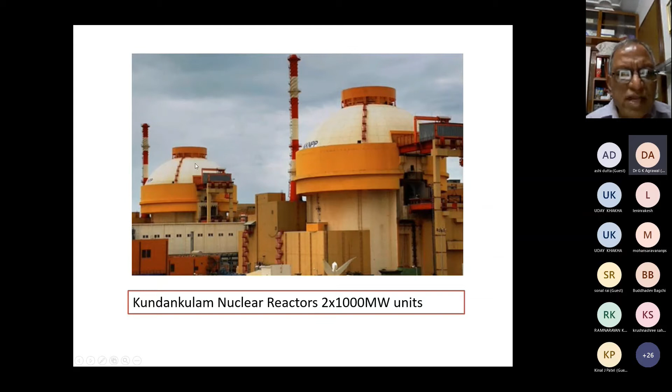Now it's a very big site. In my time it used to be very small, only two reactors like this. These are the two reactors which used to be there in the beginning, and now it has got 8 reactors, and a heavy water plant is also there. Nuclear fuel complex is there, PREFRE is there. It is a very big site, very big nuclear power plant. Whenever I am passing through, I bow my head there because it is a place of worship, for a man like me, but for every Indian, it is a proud site.

This site has only PHWR or CANDU type reactors - 4 reactors of 210 megawatt, 2 reactors of 500 megawatt, 2 reactors of 700 megawatt. It's a big site, and it is on the bank of Chambal River.

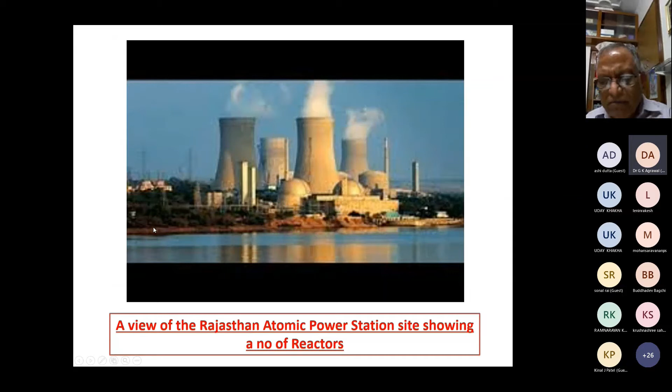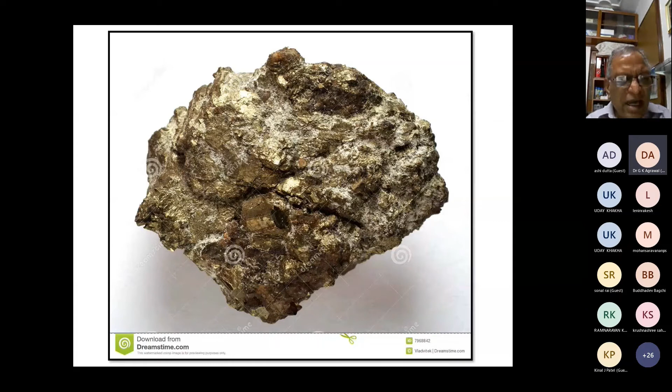Till now there is no problem. The only thing, it is an alpha emitter, but there is no problem. There is hardly any radiation other than alpha, and alpha is very feeble; it can be stopped even by a paper. Now this slurry cannot remain as it is. It will get oxidized immediately.

So what we do, we oxidize it. Anyhow it is going to get oxidized. The melting point increases by oxidizing it. This is uranium dioxide, uranium dioxide. It is fused with oxygen. Pellets are made, just like gunshots. Pellets are made, and these pellets of natural uranium.

Please take care of my words. Natural uranium pellets are inserted into these zircaloy tubes. Zircaloy tube. And then a fuel bundle is prepared. In this fuel bundle, we have got many cartridges like this. Natural uranium. Here we have some amount of uranium-235 where fission takes place.

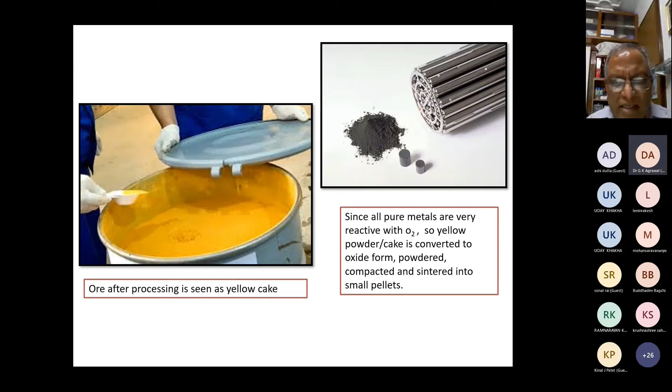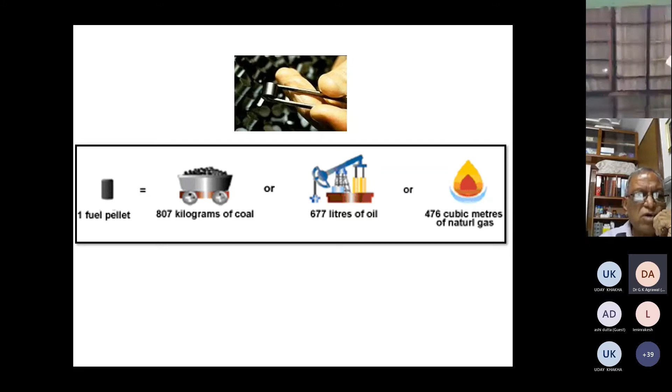Now, this is just a comparison. One small pellet, hardly a few grams, is equivalent to 807 kilograms of coal, 677 liters of oil, 476 cubic meters of natural gas. Just very small. Some technician is holding this by a tweezer just to show how tiny it is. It may be only a few grams, and uranium-235 may be very small.

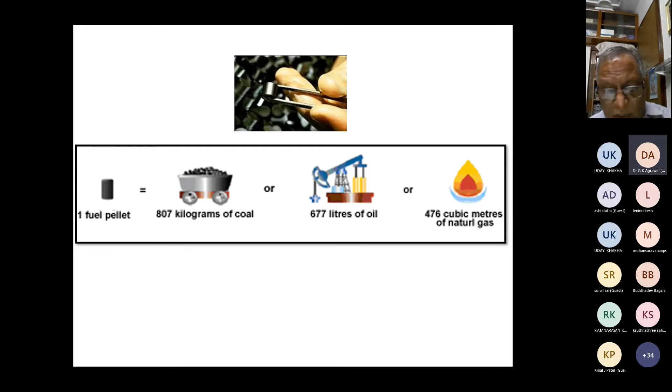Why? We are going to see. In the morning, we saw that in a coal-based thermal power plant, several thousand tons of coal is used on a daily basis. But in a nuclear power plant, for the same size of power plant, we use fuel only in kilograms, which can be transported by a car.

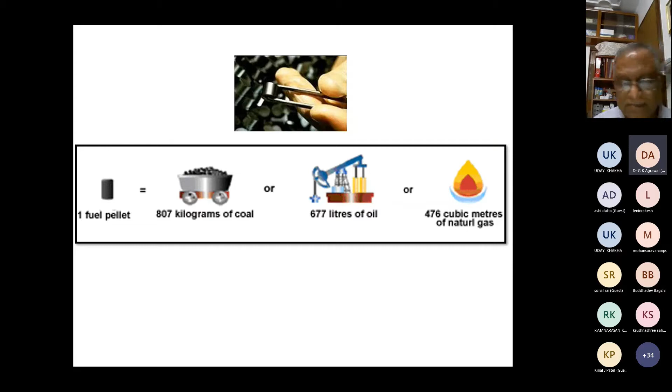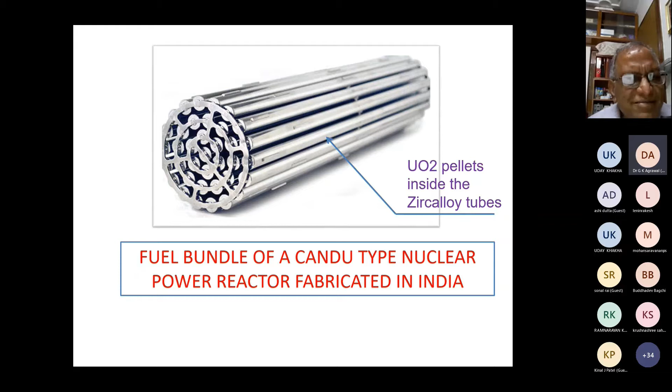Now here the fission will take place, and due to mass defect, or E = mc², mass will be converted into heat. There will be a temperature rise all over the fuel bundle, and then we pass heavy water as coolant through the fuel bundle, which picks up heat, and the heat is transported to the steam generator. It is not like a conventional boiler. Just have a look. This is something which we really worship.

Now, these are the fuel elements or fuel bundles of the LWR or BWR reactor. They are very complex. The shape is different because CANDU reactors have a horizontal reactor vessel, whereas LWR reactors are vertical. You can see another picture. Into the reactor core are inserted these assemblies, again zircaloy tubes having uranium dioxide pellets.

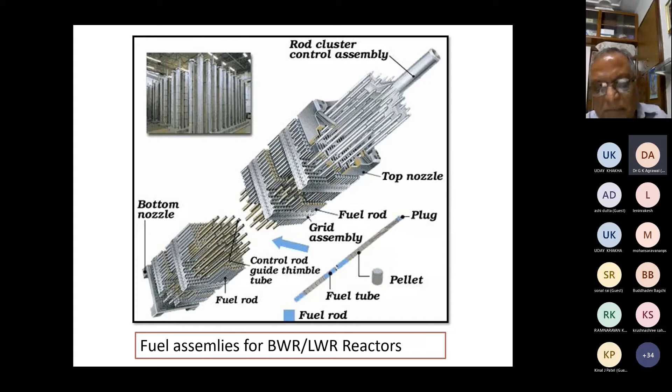Now I'm going to read the description. First of all, the atomic power reactors presently under operation and setup were 2 boiling water reactors. Next, 2 CANDU type reactors, Canadian deuterium uranium type, installed at Rawatbhata near Kota, Rajasthan.

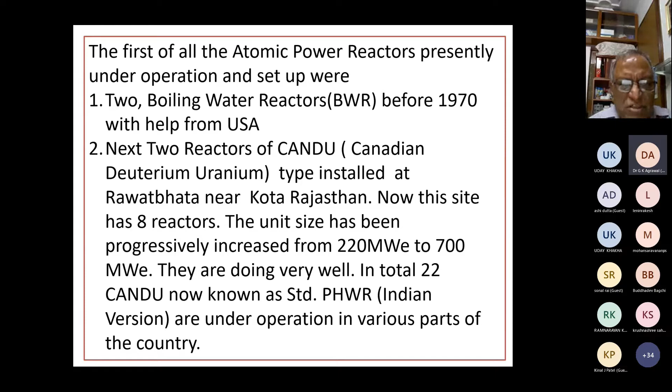Let me save my time. We also have one FBR, fast breeder reactor, 500 megawatt electrical, and the latest, we have got 2 into 1000 megawatt light water reactors. These are the biggest reactors in the country. Each unit generates 1000 megawatts of electricity.

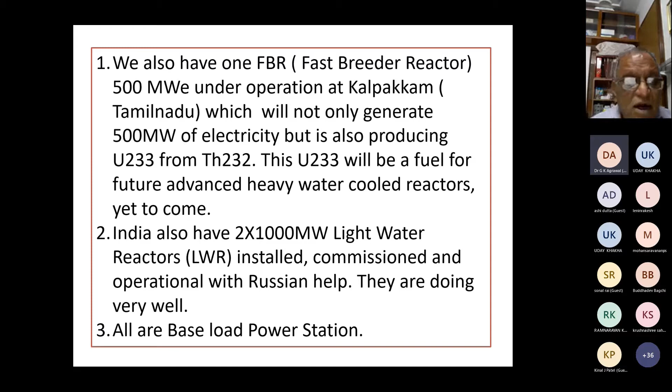So 2 light water reactors. Okay. Now, dear friends, fuel is the same. Please repeat with me, fuel is the same. Natural uranium is the fuel. The only difference between BWR, LWR and CANDU type is, in the CANDU type, natural uranium is used, whereas in BWR and LWR, enriched uranium is used. I will tell you about that later. Enriched uranium is used. All are base load power stations. All nuclear power plants work as base load power stations.

Our country is committed to the world for peaceful utilization of nuclear energy. We don't make any atomic bomb. Okay. We only generate electricity for the peaceful purpose, for the benefit of a common man. Civilization. Nuclear power is very sustainable, self-reliant, clean, quality and environment friendly.

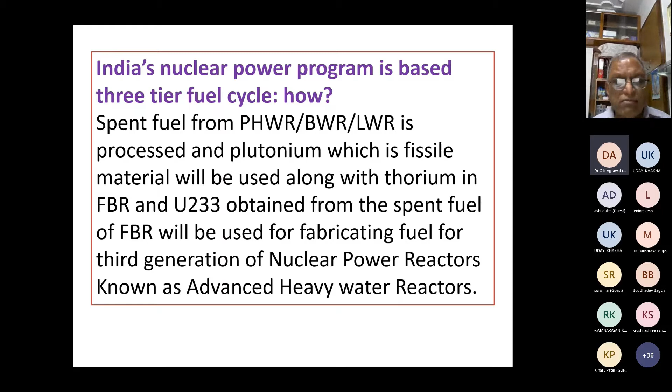Review: hydrogen as the first naturally occurring element and uranium as the last of the 92 elements. Artificially produced elements are after 92 elements. Atom as a whole is electrically neutral.

Protons present in the nucleus try to repel each other due to positive charge, but it is prevented by another force acting within the nucleus called nuclear force. This is the force which keeps the atom intact and also known as binding energy. We will see in subsequent description that the binding energy per nucleon is about 7.5 million electron volts.

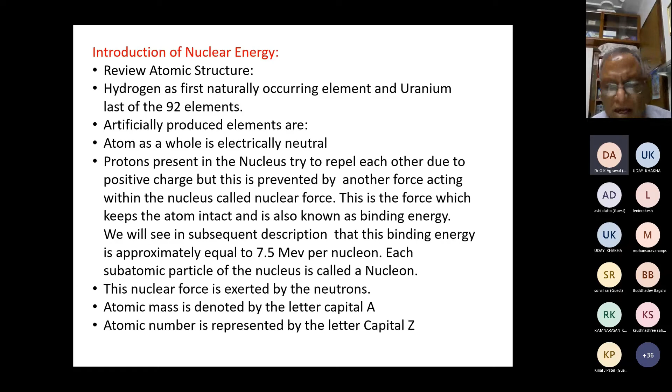Each subatomic particle of nucleus is called a nucleon. The nuclear force is exerted by the neutrons. Atomic mass is denoted by the capital letter A and atomic number is represented by the capital letter Z.

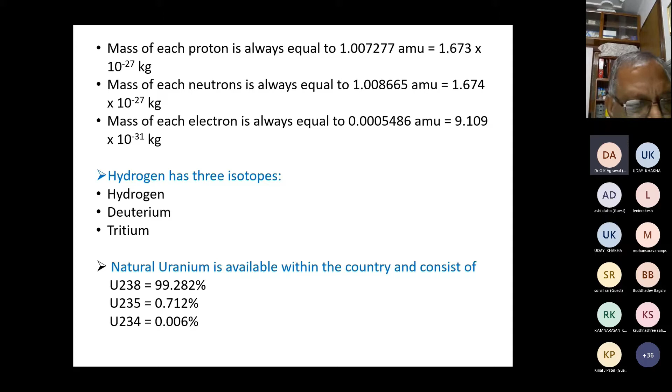But as far as nuclear reactors is concerned, it is only uranium-235 which undergoes fission, and that is so tiny, 0.712%. This is called relative abundance of uranium isotope within natural uranium. Uranium is the heaviest naturally occurring, hydrogen is the lightest. Uranium-235 is called fissile material because it can undergo fission with neutrons having very small energy, 0.025 electron volt. In thermal reactors, we use thermal neutrons because the probability of fission is very high.

Uranium-238 does not undergo fission, though it undergoes fission, but with neutrons of higher energy.

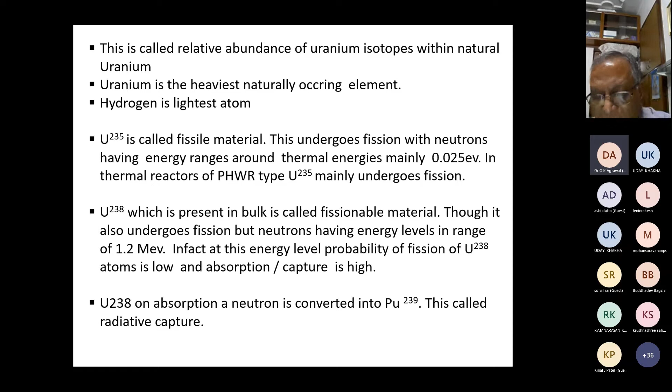Fertile materials are isotopes which are capable of becoming fissile by capturing fast neutrons. For example, thorium-232 plus 1 neutron is converted into uranium-233 by beta decay. इसी तरह से plutonium-239 भी बनता है. ये दोनों फिसाइल मटेरियल हैं. So a material which by absorbing a neutron can be converted into fissile material is called a fertile material. So thorium is a fertile material, uranium-238 is a fertile material.

Fission process. What is a fission process? Splitting of a large atom like uranium-235 is called fission process. और कोई एटम का फिशन नहीं होता. It is only uranium-235 which undergoes fission, and that too by neutrons having very small energy. During each fission, two daughter nuclides of mass ranging between 70 to 160 are produced.

160 are produced as a result of the unstable condition of uranium-236. This is associated with 2 or 3 fast neutrons having energy around 2.5 million electron volt and tremendous amount of heat energy due to mass defect. Please note my words, due to mass defect. E is equal to mc square, the famous Einstein equation, where mass is converted into energy. The neutrons produced as a result of fission are known as fission neutrons.

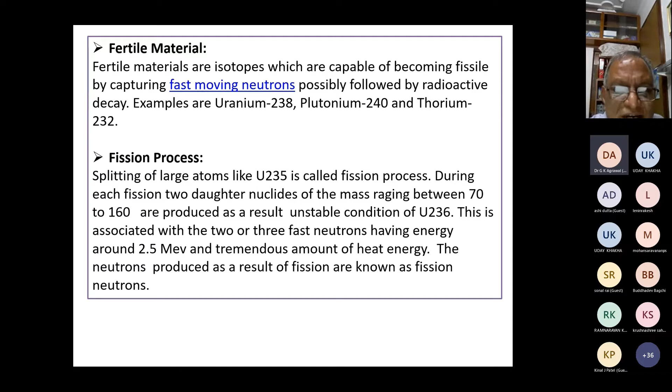Here it is only one atom. There are billions and billions of atoms of uranium-238, 235 in the reactor core. So just like that, the fission of billions is going on simultaneously. So one atom of uranium-235, 92 is atomic number and this is mass number. And thermal neutron, I should write thermal neutron here.

It captures it immediately. As it captures it, it becomes uranium-236, which is highly unstable, and it splits instantaneously into one large and one small nuclide. So here the large is barium and small is krypton. It can be any. So here the barium and krypton, they are called daughter nuclides, and 3 neutrons. It consumed 1, but it emitted 3. Here the energy is thermal energy. Here the energy is fast energy, 2.5 million electron volt.

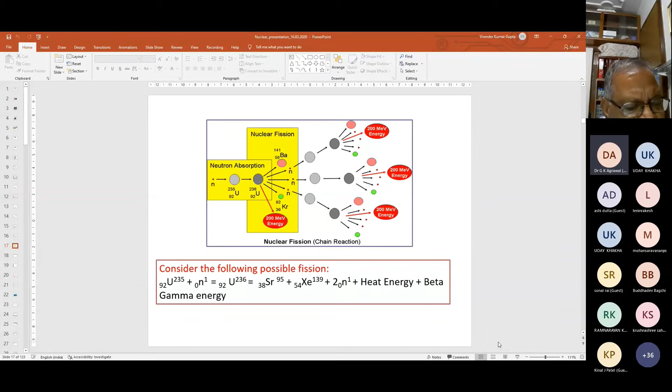Yes, sir, we can hear you loud and clear, sir. And are you able to understand the text? Yes, sir, it's clear in the PPT presentation.

Okay, yes. Very well. Now we will find out the mass defect. In every fission, we have about 0.215 AMU mass defect. If we calculate the mass defect by mass spectrometer, not by chemically balancing the equation, every fission results in a 0.215 AMU mass defect. And we know that 1 AMU is equal to 931 MeV. So in every fission, it will produce about 200 million electron volts of energy.

We will calculate how much by using how much. This is of great interest because I'm talking about a power plant. I'm not talking about a laboratory experiment, or an academic description. No, not at all. It is all about the power plants. So how much energy is released by consuming how much material. And that will be very, very surprising to you when you go through the data.

The energy released during one fission is not of much practical value, since it is only equivalent to 3.1 into 10 raised to the power minus 11 watt second. So tiny. And to produce 1 watt of power, see, 1 watt of power. More than 1 watt I can generate by a simple dynamo from my bicycle. 1 by 3.1 into 10 raised to the power minus 11. Please correct it, fissions per second. That means 3.1 into 10 raised to the power 10 fissions per second will produce only 1 watt of power.

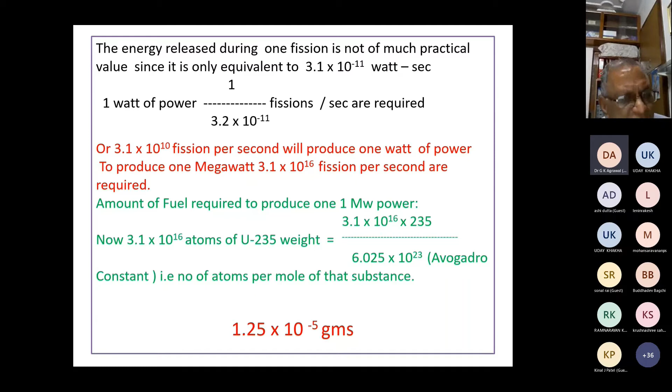Oh my God. Of uranium 235. 1.25 into 10 raised to the power minus 5 grams of uranium 235 will produce 1 megawatt per second. Let us calculate per day. Therefore, in order to produce 1 megawatt of power, 1.25 into 10 raised to the power minus 5 gram of uranium 235 will have to be consumed each second.

Mass of uranium 235 for 1 megawatt day of energy: multiply it by 24 and 3600. 1.25 into 10 raised to the power minus 5 grams into 24 into 3600, and it comes out to be 1.08 grams of uranium 235. My good God. Just 1 gram of uranium 235 will produce 1 megawatt a whole day. And you know how much coal we need for the same amount of electrical energy? Several hundred tons of coal.

This is a kind of comparison between the two. And no pollution whatsoever. Those who speak about the pollution, like Greenpeace people and so many other people, it is all humbug. They fool the common man. The people demonstrating outside a nuclear facility, they fool the common man by creating a fear. Nuclear? No. It is very, very safe. It is very clean.

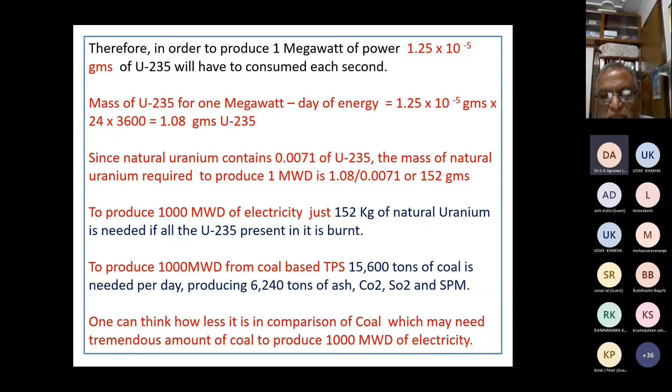Okay friends, so this is 3-tier based. PHWR, why is it used now? It is an indigenous PHWR because a lot of natural uranium is available within the country, but still not sufficient. Recently in Rajasthan, at a number of places, uranium has become available. It's very good news for Nuclear Power Corporation of India Limited.

From Rajasthan, at a number of places, UCIL has conducted surveys, and uranium mines are available in abundance. It's very happy news. So PHWR is chosen because they are our own reactors, based on our own fuel, fabricated bundles of our own fuel. Whereas for BWR and LWR, we have to rely on outside sources.

Any day they can threaten us, and they keep on threatening us. For LWR, we are getting fuel from Russia. Any day Russia can stop, even if we have got an MOU, it doesn't matter, who cares for your MOU? America has already threatened us several times: 'I'm not going to supply any further fuel for your BWR reactor.' What can we do? Nothing.

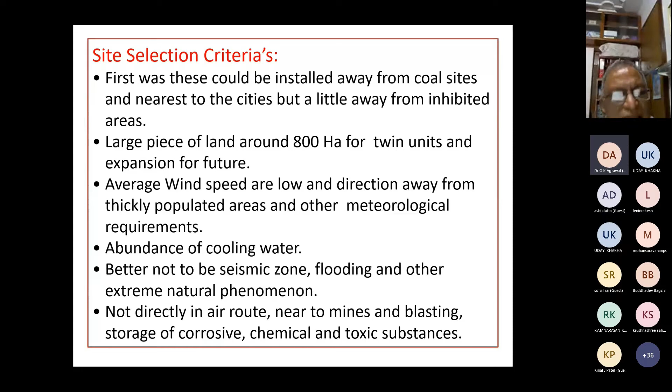Friends, let us look into the inside of a CANDU reactor. CANDU reactors means Canadian Deuterium Uranium. Canada, because the reactors were conceived or developed in Canada, that is why it is called CANDU. Now we don't call them Canadian, we call them Indian, because we have now re-standardized them as per our conditions. Deuterium: they use heavy water as coolant, and they use natural uranium as fuel.

That is why we like this design. That is why more reactors of this type are there in our country, CANDU type reactors, more than 22 reactors as on today. My dear friends, the share of nuclear power as on today is very low, only 3.2% out of the total. We feel ashamed, but what can we do, we have a lot of constraints.

The basic components of a nuclear power reactor: this is a reactor building, which houses all the nuclear systems. It's a cylindrical, tall structure with a dome at the top, very voluminous. The walls of the reactor building are about 1 meter thick, heavily reinforced cement concrete, double walled, and it acts as a pressure vessel.

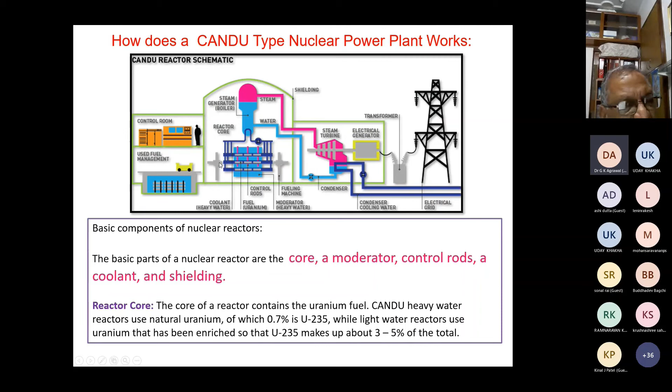It might be in some other file of mine, it would have been good to show you. So anyway, no problem, you can summarize yourself. Light water is fed into the reactor vessel under pressure, and it flows past the fuel bundle, picking up heat.

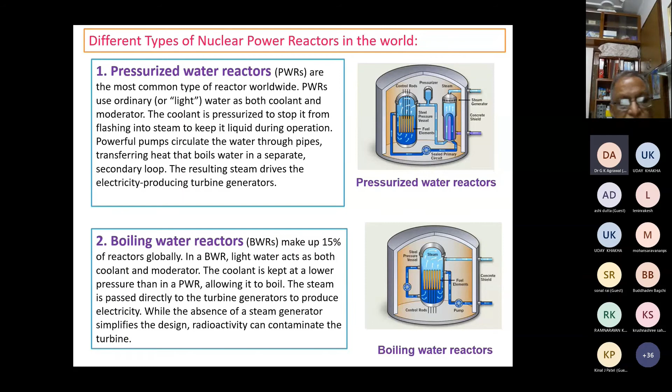Now VVER type reactor, I will show you a view of a reactor vessel. This is the view of the reactor vessel. I pick up the reactor vessel from my picture and place it here. This is how it looks from inside. It is highly complex in terms of fabrication, material, welded joints, non-destructive testing. Everything is very complex. And for fueling, once in 2 years, you have to open it from the bonnet.

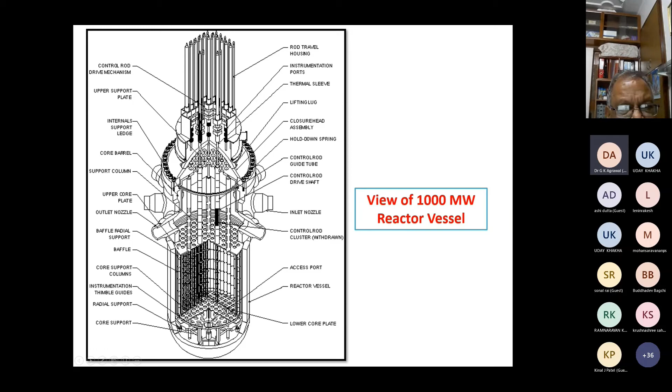Bonnet has to be lifted up. Then the reactor core is visible. Whichever fuel channels are to be replaced are lifted by a crane available above it. When they are removed, they will have millions of Roentgen field. So it is not taken out naked, but taken into a flask and immediately transported, because the radiation levels are very high. It is very complex.

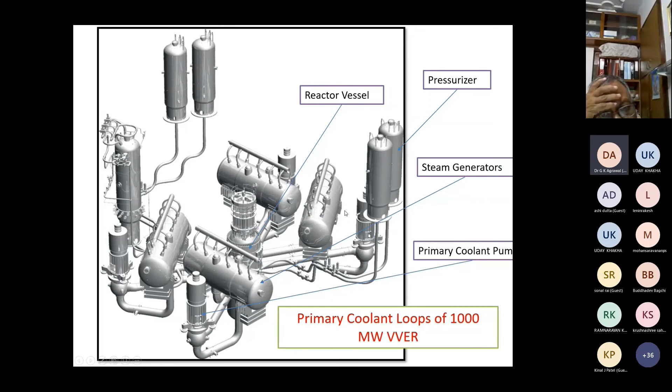And the primary heat transport system. This is the reactor vessel. These are all the control rods. This is the reactor vessel, this is the bonnet, and the primary heat transport pump. They are very complex pumps, with triple level mechanical seals. There are four loops, 1, 2, 3, 4 in parallel, and these are the horizontal steam generators. These are the pressurizers, very complex in terms of everything. This is the fuel bundle which you have already seen.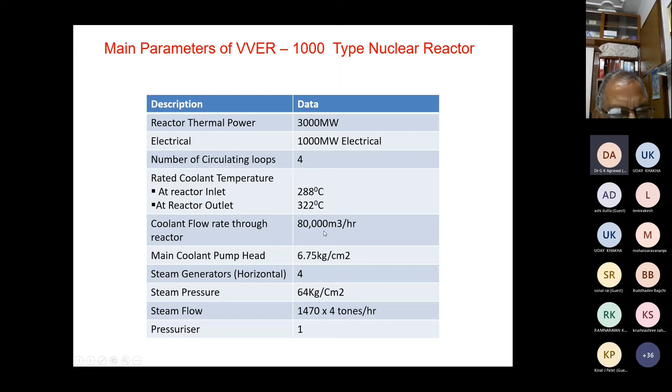Not high, because low pressure and temperature turbines are there. Low pressure turbines are very bulky, and the mass flow is very high, 80,000 cubic meters per hour. Some of the data I have already sent in my PPT.

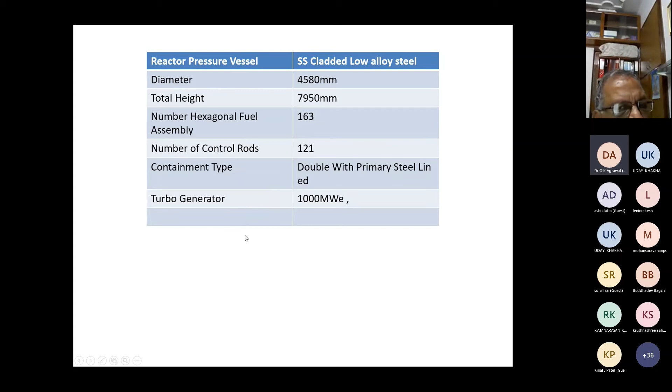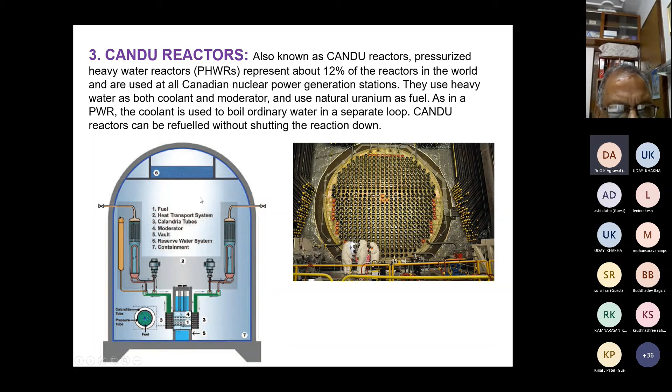Now this is inside view, a sectional view of a reactor. Okay, this is the reactor core. See, these are the mushroom heat exchangers. These are the primary heat transport pumps.

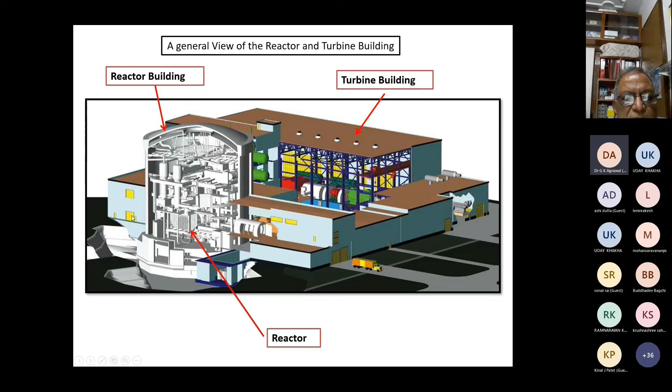Oh, beautiful. Now this is Calandria. This is one view. This is called the enclosure, Calandria enclosure or Calandria vault. Once it is made critical, then it is sealed forever. Then nobody can penetrate or go anywhere inside it because the radiation levels are very high, very high.

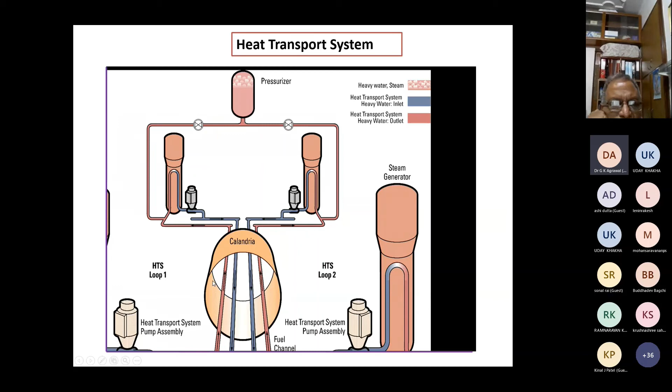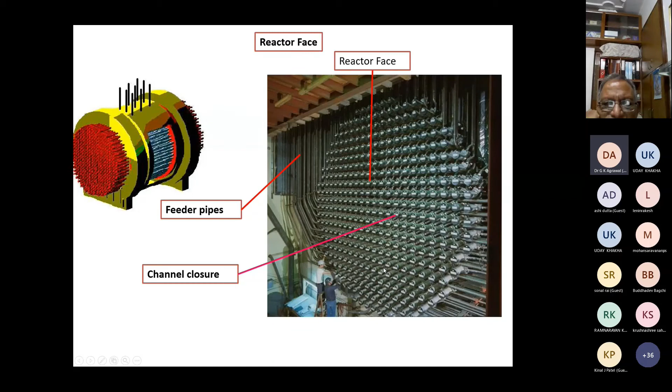Materials are very complicated. This schematic is shown: this is the Calandria horizontal reactor vessel. This sky blue, it is the calandria, this is the end shield, this is the coolant channel. This is one schematic. This is the coolant channel and both sides of the coolant channels are end fittings. End fittings have got the provision for inlet and outlet of the coolant, and these are all the fuel bundles, 12 fuel bundles, which are shown here.

Moderator is outside, coolant is inside. The coolant enters, passes like this, comes in contact with the hot fuel bundle, picks up heat and goes outside. Okay. The fast neutron will be produced here. It will go out. It can penetrate through the solid metal. It penetrates out and makes thermal collisions with the moderator deuterium atom. It makes a number of collisions, some thousand collisions, and its energy will come down from 2.5 MeV to 0.025 eV.

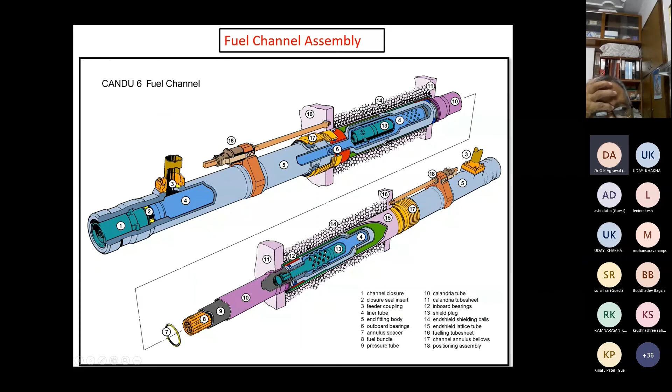There are inspectorates over all the nuclear installations under operation everywhere in the world, but let us talk about India. In India we have got the Atomic Energy Regulatory Board, which is there in Anushakti Nagar, Chembur, part of DAE, Department of Atomic Energy.

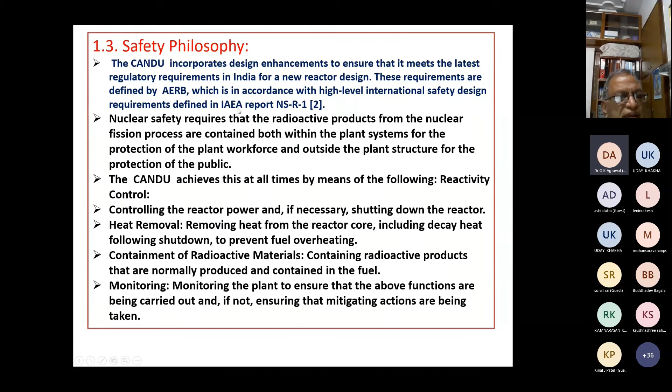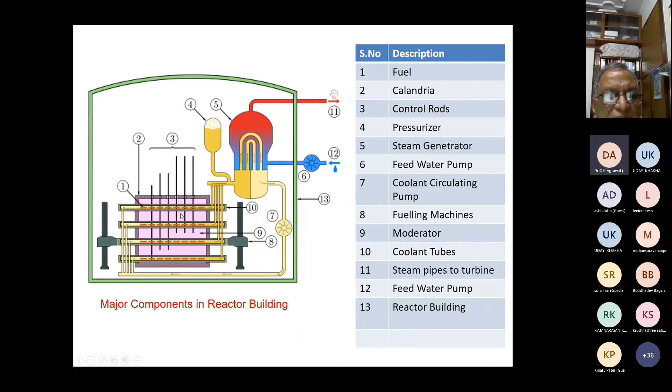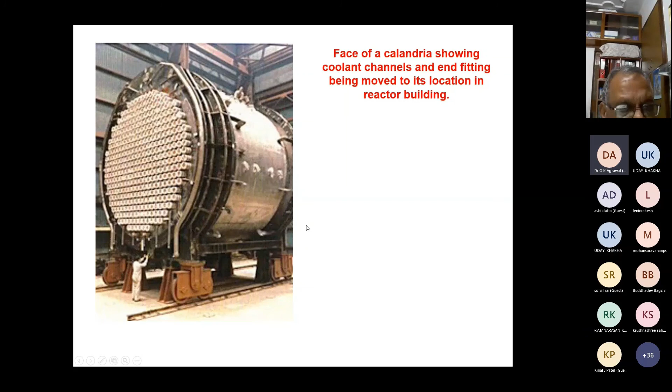Now these are the data of the 500 megawatt reactor.

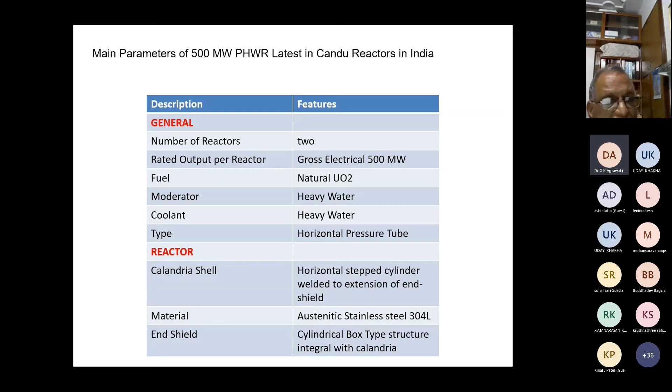Moderator is heavy water, coolant is heavy water.

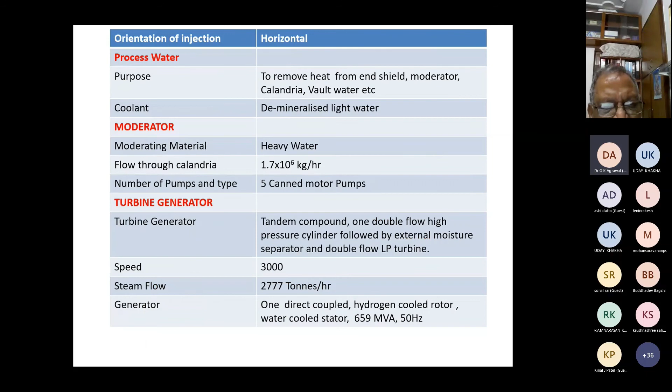Kalpakkam. It is an indigenous one based on Phenix, a reactor of France. Phenix of France. They are very risky reactors.

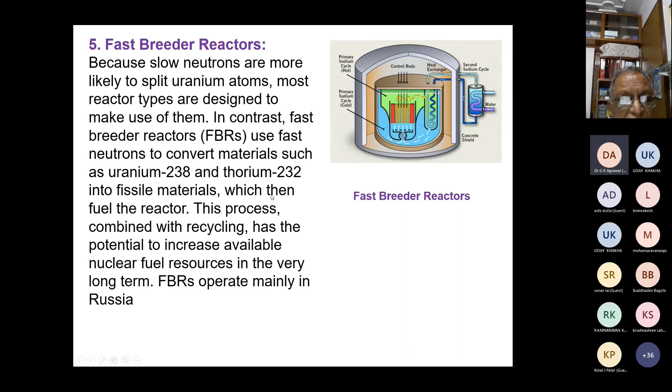I don't know how many of you are sleeping.

Fast breeder reactor. See how uranium 238 is converted into plutonium. One fast neutron comes, and uranium 238 captures it, just like a baseball man catches it. It becomes uranium 239. I don't know how comfortable you are with these equations. Uranium-239 by beta decay is converted to neptunium-239. See, the atomic number is increasing.

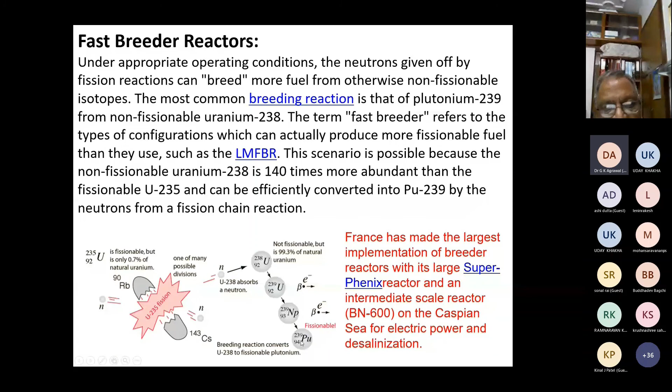Now this plutonium is very, very essential and very costly from all points of view, all purposes. Now they are all possible inside the reactor. Okay, so this is a fast breeder reactor and this is the first primary heat transport cycle. This is the secondary heat transport cycle. This is the light water where it is converted into steam and then turbine.

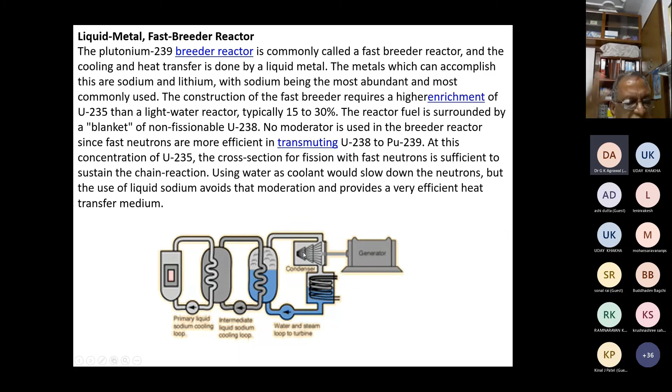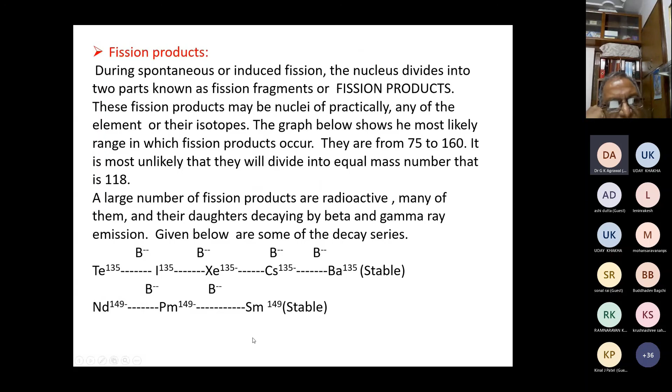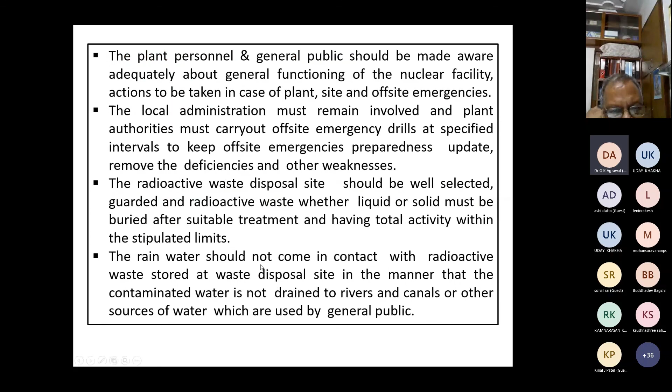Okay, now a lot of things have to be considered: the radiation aspect, the radiation management aspect, the disposal of radioactive waste management aspect. There are many things. Some of the information is summarized here. How the reactor is made critical, from where we get the first neutron. Everything is written if you go through my PPTs.

So, dear friends, let me come to the conclusion part of it. I hope you must have picked up something. And are you ready with any kind of questions? Have you written them down? So abruptly I conclude it because of the time constraints. But it is very interesting, you know, because it is full of science. It is technological. It is highly full of physics.

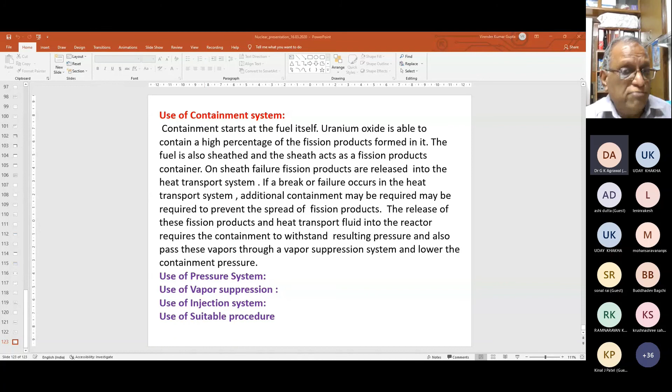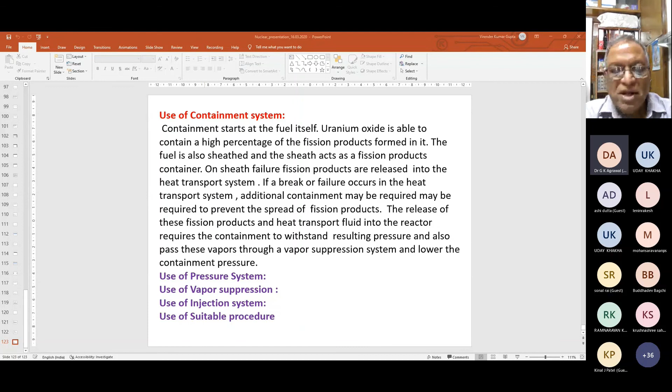Now, any question relevant to whatever I spoke? Before I hand over the session to the next faculty, they too must be restless and waiting for their turn because it is getting delayed. Morning session was delayed. Okay. Any question? Sorry, all participants. Any question, at least one or two questions? Hello, coordinator, sir. Yes, sir. Anybody, you can unmute people to ask questions. Otherwise, I'll hand over. Hello, sir.

Sir, what is the cost of electricity generation? Oh, beautiful. Something like 3 rupees or even less. It is comparable to thermal, comparable to coal-based. Otherwise, nobody will buy electricity from us, because electricity is sellable in the open market. Electricity is being sold on a daily basis in the market nowadays. So it is comparable to a coal-based thermal power plant. Okay, sir.

2.5, sometimes less than 2.5. That is why the unit sizes are increasing: 210 to 500, 500 to 700, 700 to 1000 megawatts, so that the cost per unit comes down. Okay, sir. And the cost of installation is also not different. If thermal is costing about 6 crore per megawatt, this is costing about 6.5 crores per megawatt. But we are managing them very well, touch wood, and God bless all our nuclear installations. The future depends only on nuclear.